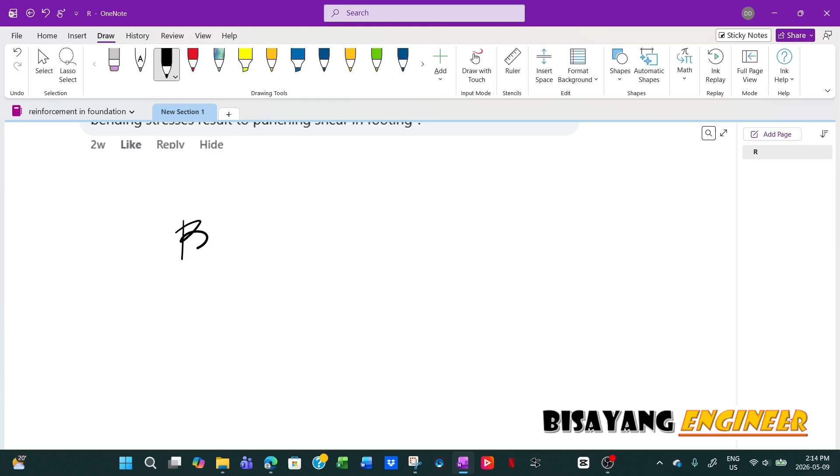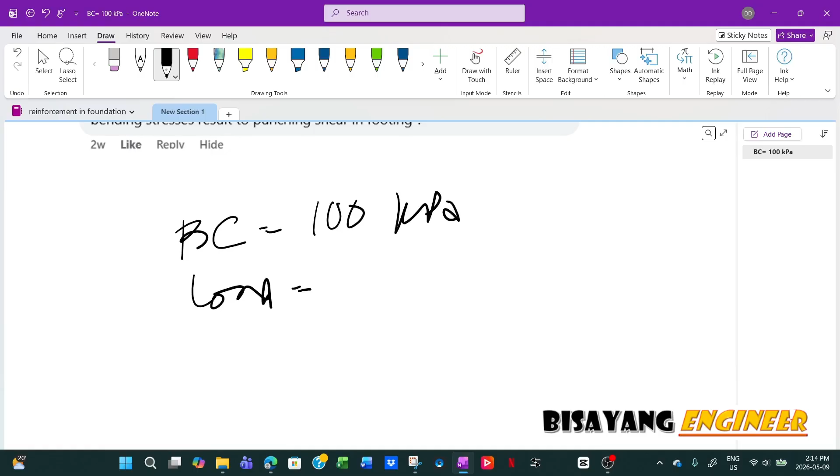As we all know, the procedure for designing a footing is first: you have the bearing capacity, right? Say, for the sake of discussion, 100 kPa, and your load is 100 kilonewton, just for the sake of discussion.

So first, when you design the footing, you have the load and the bearing capacity. First is to determine the area, which is length times width. All you have to do is divide the load by the bearing capacity, so now you have the area.

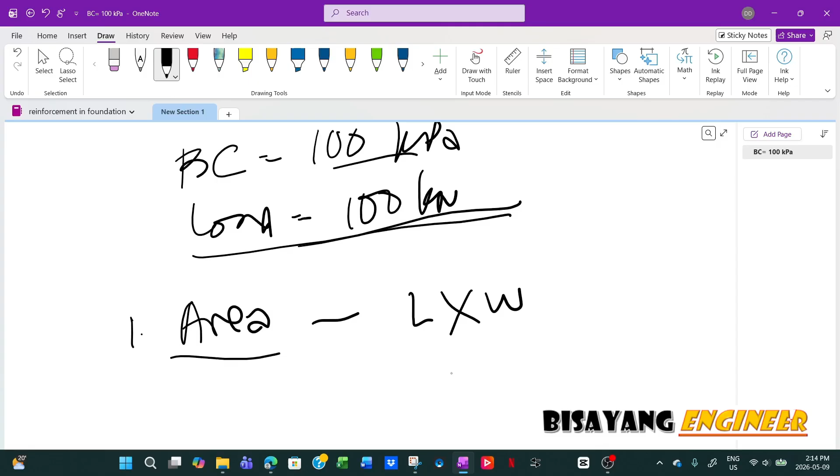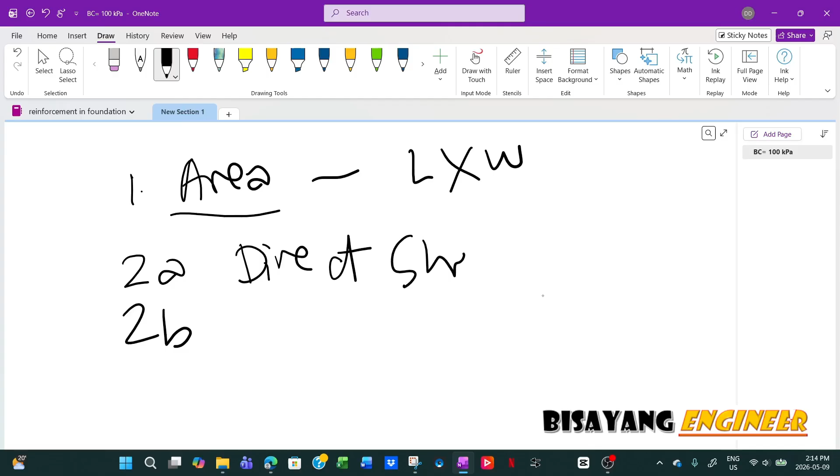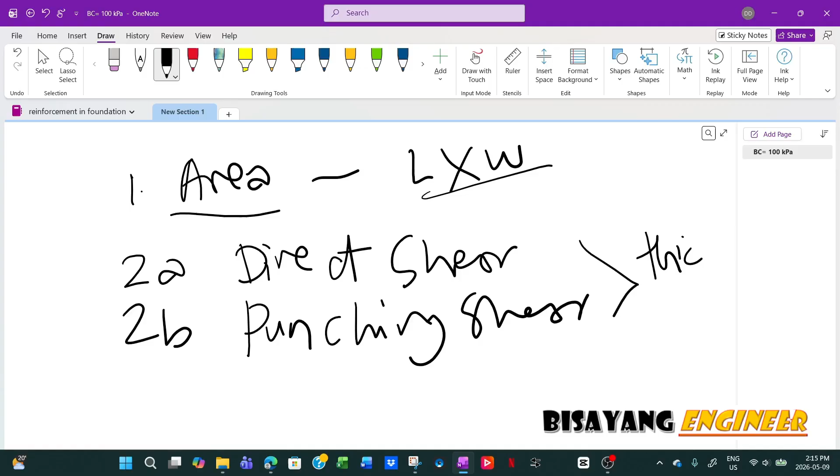Now, next check for that is 2A and 2B. This is the direct shear or one-way shear, and the second way is punching shear or two-way shear. At this step, you already have the dimension, so this time you will check and design the thickness, depending on which governs between direct shear and punching shear.

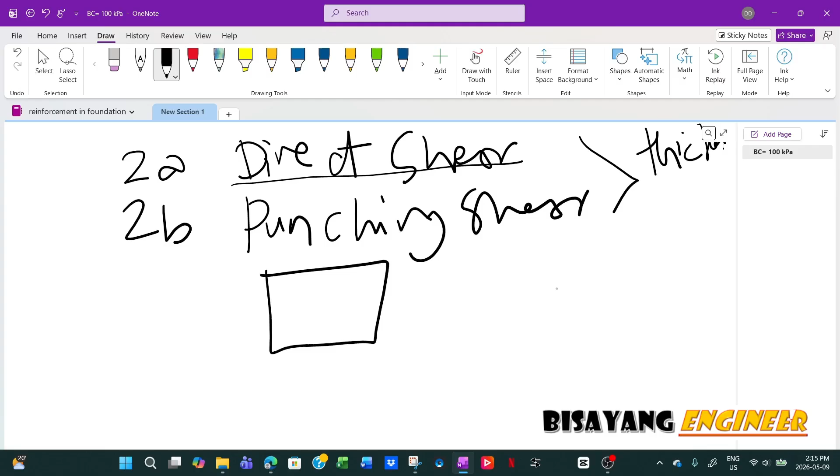So now you have the area and the thickness. Once you determine the area, the dimensions, and the thickness, that's the time you check for or design it for bending - step three is bending, and that's where you get your rebars.

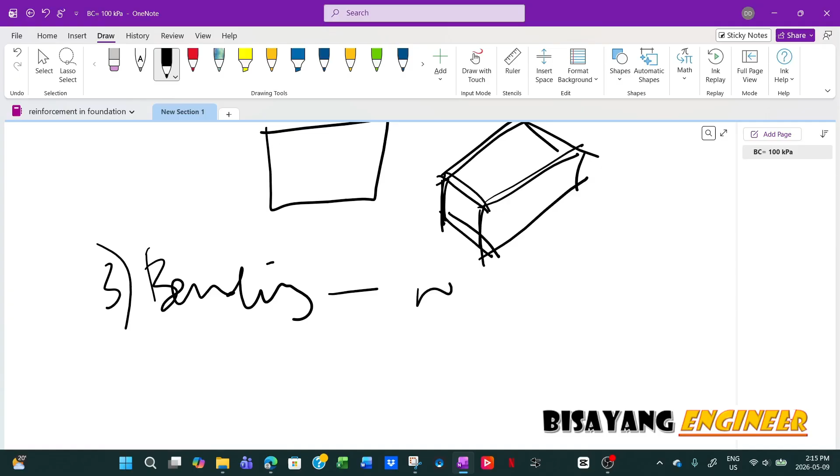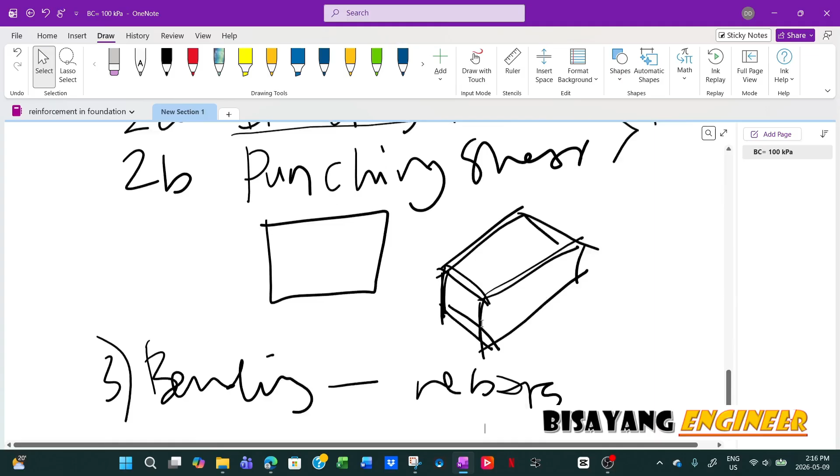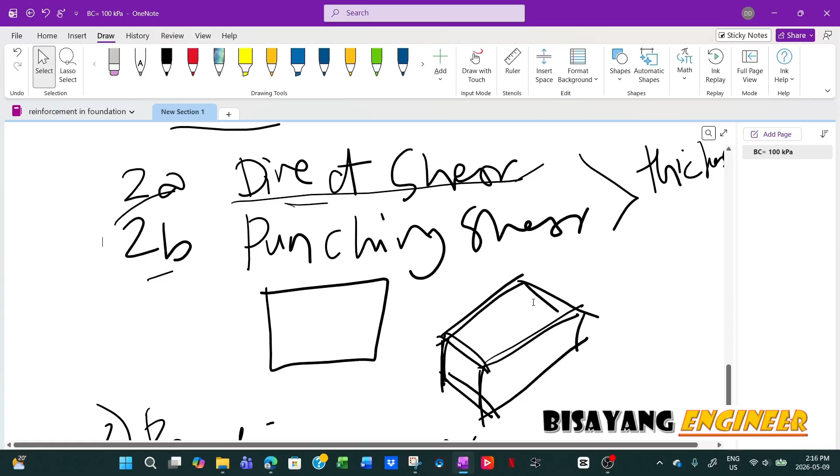Now, that's why I was confused with his comment, because he said you have to compensate the loss of reinforcement. In practice, this is what you do: determine the area, then check for thickness. So you already design for thickness even before you design for reinforcement. Why would you compensate the loss of reinforcement when in the procedure you have to check the thickness first to meet the punching shear or direct shear requirements before you design the bending?

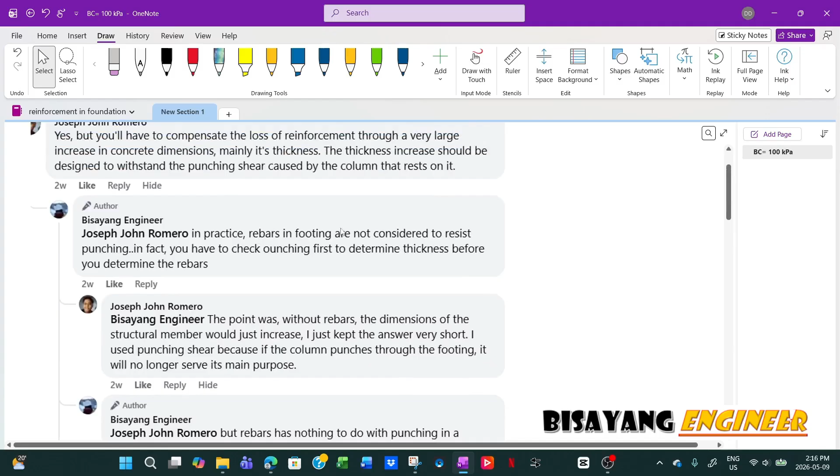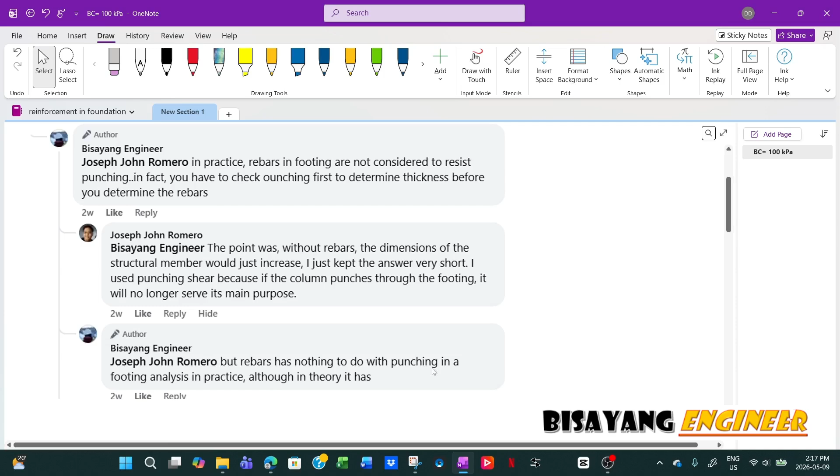So this was our first exchange of ideas. I told him rebars have nothing to do with punching in footing analysis in practice, although in theory it has. Of course, once you have the rebar - but like I said, in practice we don't consider the rebar for punching, but it has, in theory, some help - we just neglect that part in designing the foundation.

It's the same as if you design, for example, a flat plate - all you have to do is add reinforcement to resist the shear. For example, if this is your column, this is your footing, this is your punching shear plane. Now, if you have rebars here, it will cut through the rebar, right? So in theory, it still helps with the punching.

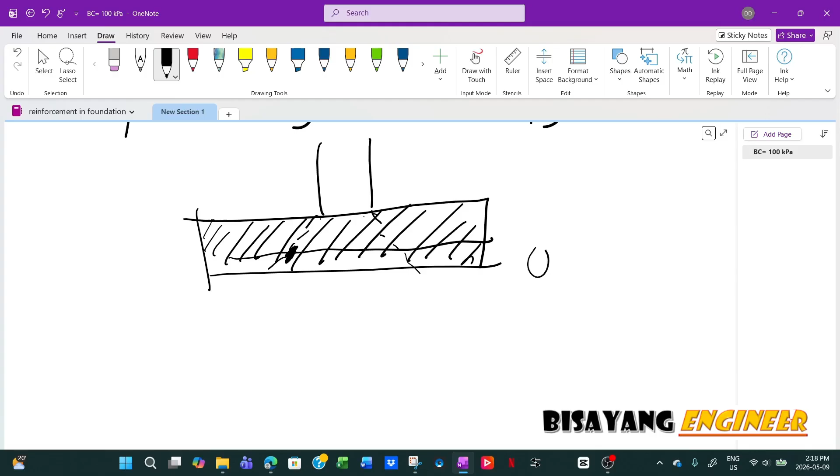But in practice, we don't do that. We'll just check the full capacity or full resistance for punching, relying on the capacity of the concrete itself without any reinforcement. So you use the formula for that.

So that's why I was confused with his comment. And then in further discussion he mentioned that the bending is initial failure.

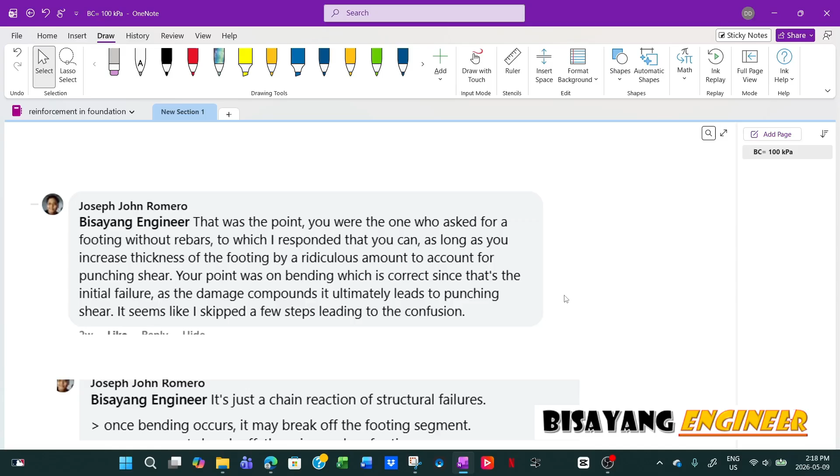He's talking about initial failure and then the final, the ultimate failure. So this is his answer or response to mine. If you're curious about our discussion, you can check that post, but I only took screenshots of some of the important points he raised.

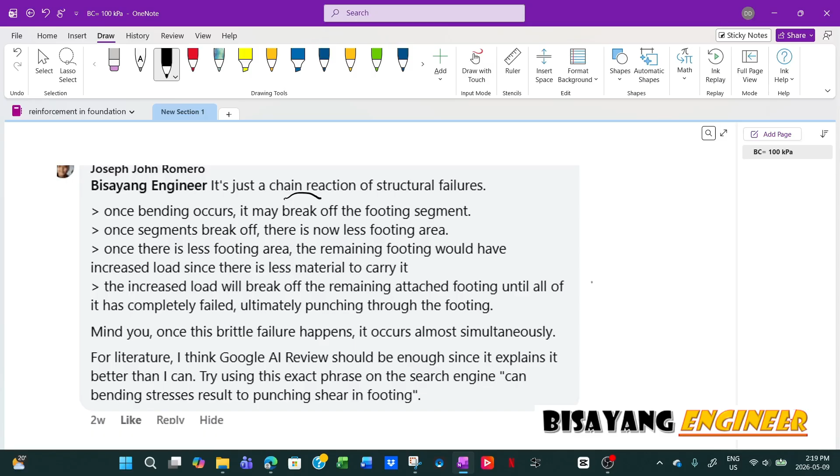So he said it's just a chain reaction of structural failures. Once bending occurs, it may break off the footing segment, and once segments break off, there's now less footing area. And I told him I understand this sequence, no question.

Basically what he meant was, so if this is your footing, right, and this is your column, and you have the rebars here. Now if this, for example, is your shear plane, this is where you need the rebars, because this is now outside the influence of the shear plane.

So that's why, in whatever chapter that is in ACI, as long as this length here is equal to or less than the depth, then you don't need reinforcement, because this is now in compression.

Even in the ACI code, under plain concrete, you don't need reinforcement as long as the element is always in compression. So this is what I'm trying to arrive at when I posted that question, because I'll be discussing footing and also underlying foundation.

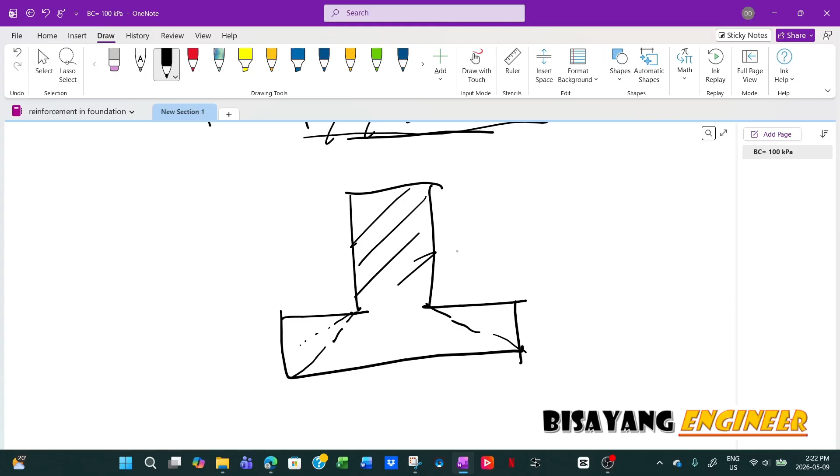But my point was, if you have a column or wall footing, and this is your wall or column, and if this influence line - even if you have a thick footing - what will happen is it will follow the same slope regardless of your thickness.

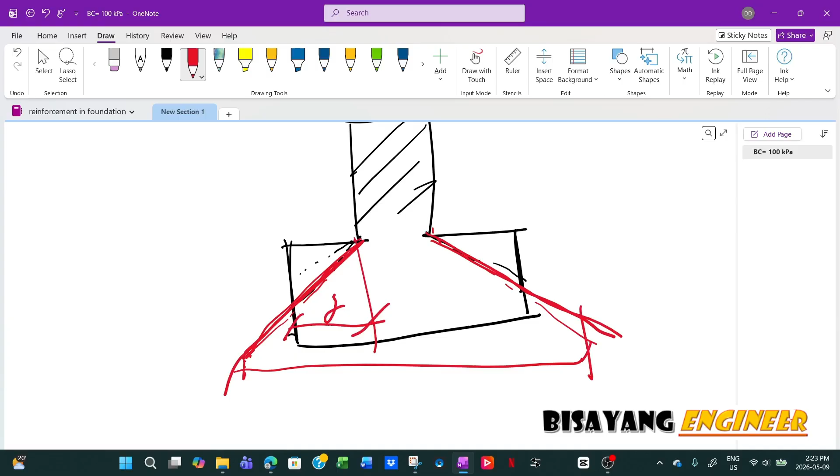Now if this influence line exceeds the width of the footing, or if this cantilever portion, say L, is less than the depth, what will happen to the failure or the shear plane?

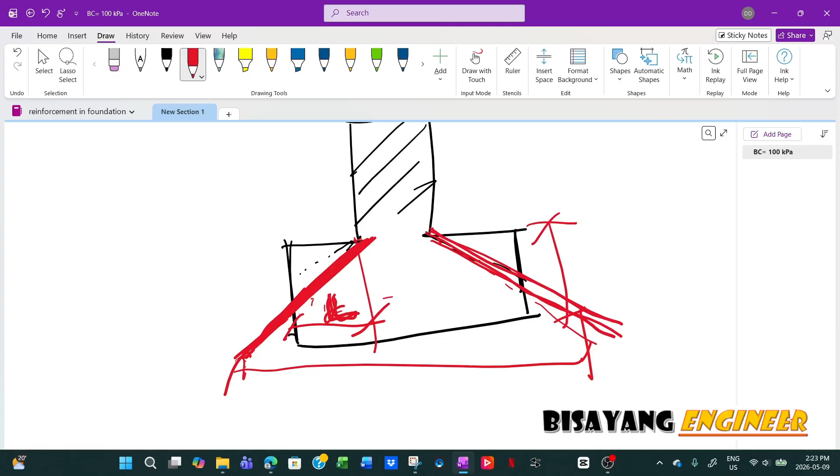That means this footing will always be subjected to compression, unless there's an uplift on your footing - that's another story. But if this is always subjected to compression, then technically you don't need reinforcing bars here, because it's always in compression.

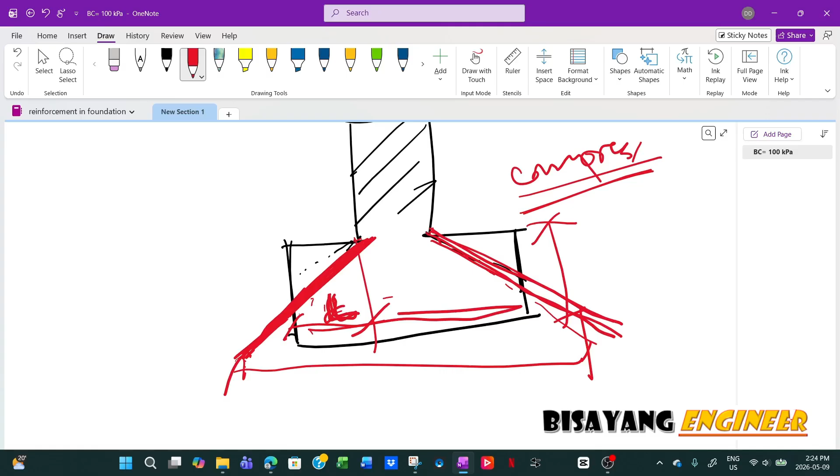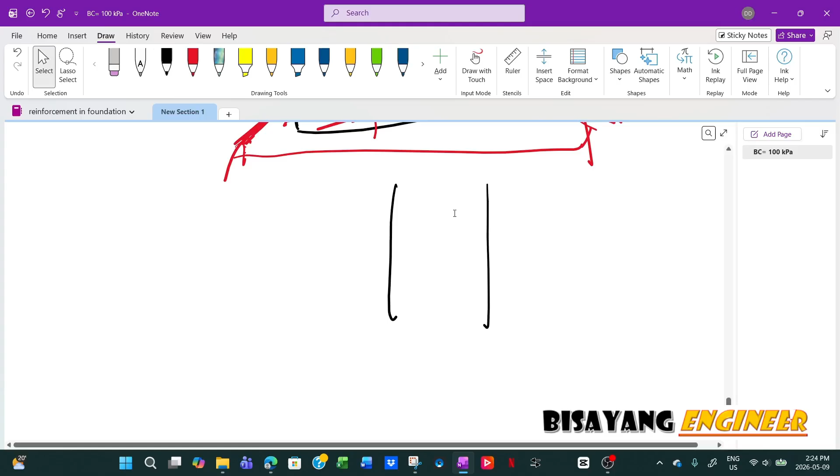The same if you have an underlying foundation, like a pile or bell pile as we commonly call it. So this is what it looks like for a bell pile. Now the reinforcement for the underlying foundation or bell pile - that's the only reinforcing bars. And sometimes this vertical column doesn't even reach the bottom of the pile.

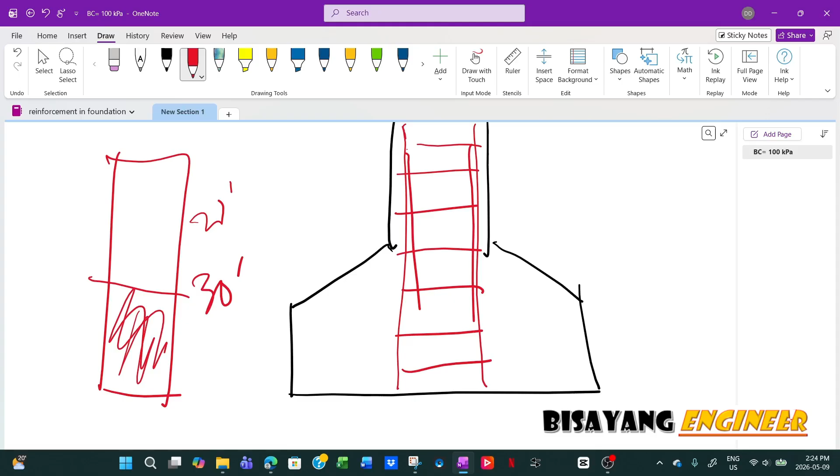Sometimes you have, say for example, this is 30 feet. Some engineers will design the pile only up to, say, 20 feet, and then this part is no longer reinforced, which is fine - I've seen this many times with other designs, but personally I don't do that. I always have reinforcing bars all the way down.

But this part is not reinforced. So all you have to do is design the bell area based on the bearing capacity and the load, so you'll have the assumed uniform pressure here. This will shear off right here with this load. Now as long as this thickness is designed to resist the punching, you don't need reinforcement.

So this is what I'm trying to say, or what I had in mind when I posted that question - that you don't need reinforcement here. Same with footing: as long as this is always in compression, you don't need rebars.

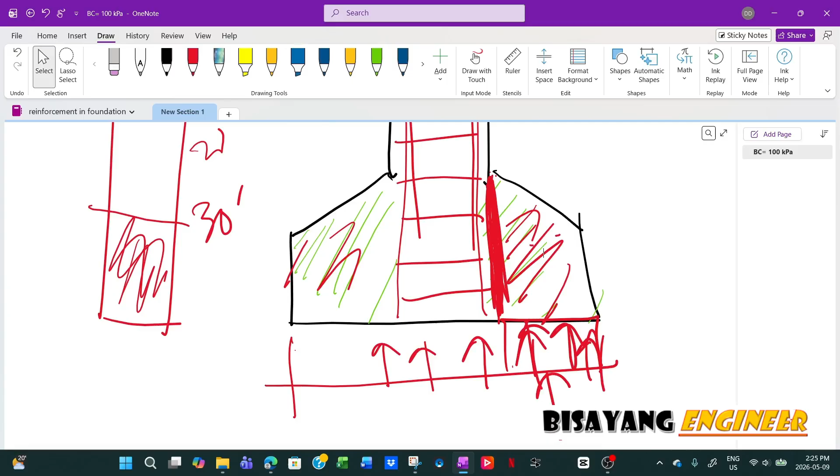The confusion starts when he said to compensate the reinforcement, the bending is the initial failure, and then what we call punching is the ultimate failure. And honestly, I've never heard or read something like that in any literature I've read.

That's why I asked him, because that's what I always do. If I see comments I'm not familiar with, even on Facebook, I will always research, just to know if there's something new, some innovation. I always do that, always search, so by reading I will learn something.

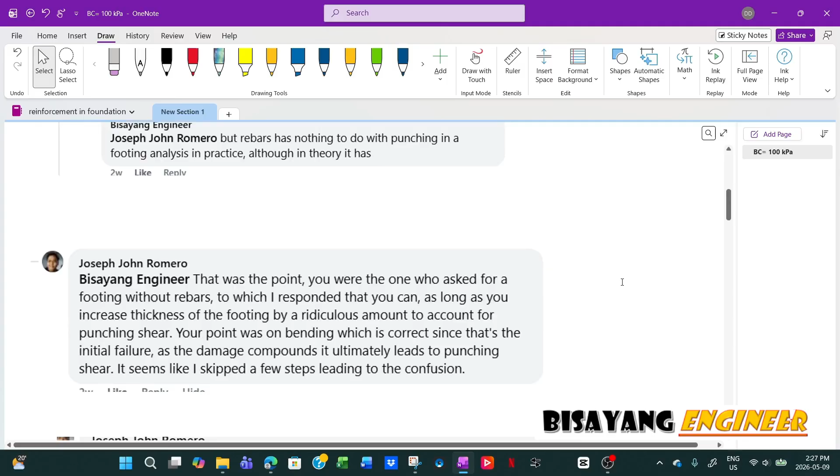So I asked him, do you have any literature that I can read, because it really interests me what he said.

Well, at first he said he searched AI. Disclaimer, I don't really trust AI right now, because what AI does is gather all available information, even if it's wrong. It could be a Facebook post, a forum, or any discussion, and it will compile all that information.

That's why, if you've tried this, we've tried it in the office, if you just twist or rephrase the question, it will sometimes arrive at information completely opposite of what you searched earlier with the first question. So he said, try using this exact phrase.

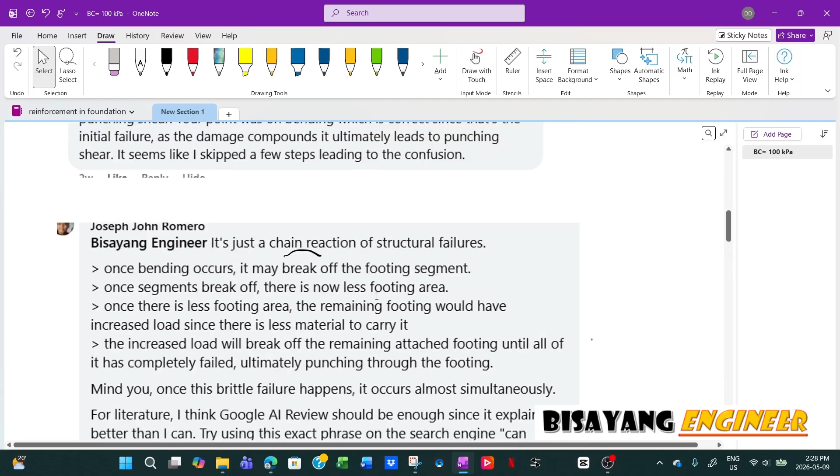I haven't tried it, but yeah, we can. And then he also mentioned a book - I didn't screenshot it, but he mentioned a book. I searched it, and it referenced ACI as well.

I don't know, maybe I missed something, but I'm not familiar with the recent provisions of ACI, because the last time I read it was ASCE 7 or ACI 318, I think zero... I can't remember exactly, since I was still working at the outsourcing company in 2009. The last IBC code I used was 2006, and ACI 08 I think. But over that period, I've never read that initial failure is bending and the ultimate failure is shear.

So I was really curious, and I asked him what literature he read so I could look into it. He mentioned a book, and I looked it up. I told him in my comment that if it's not too expensive, I'll buy that book for sure.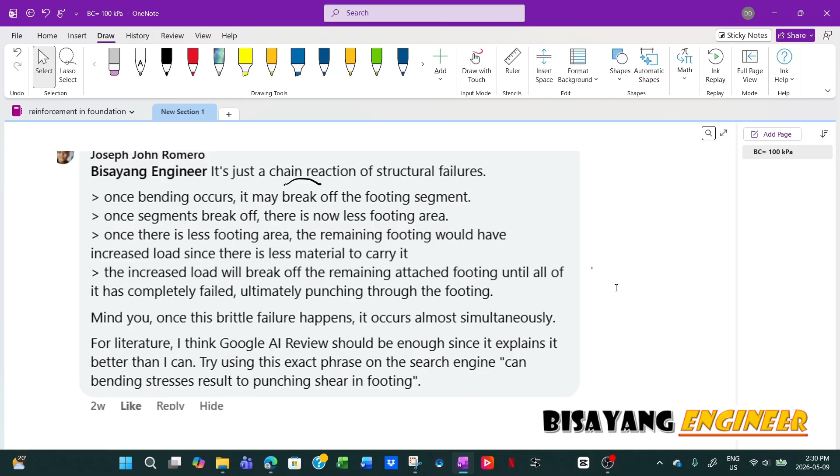When I looked at it on Amazon, sometimes you can see the table of contents or an introduction preview, and it referred to ACI 318.

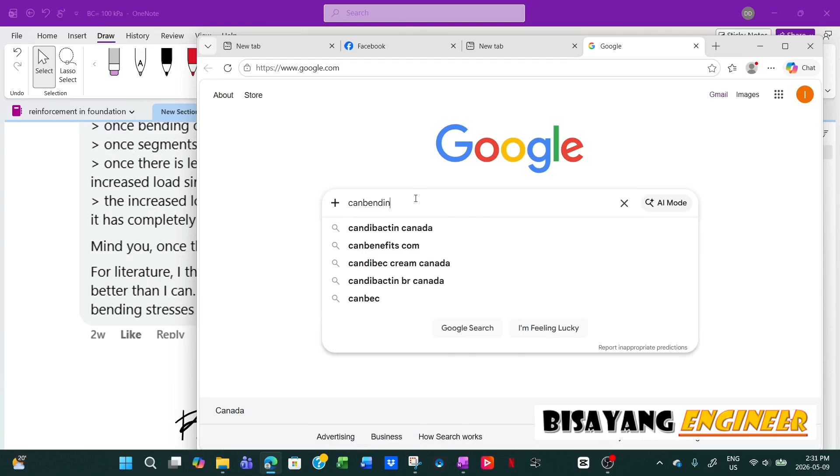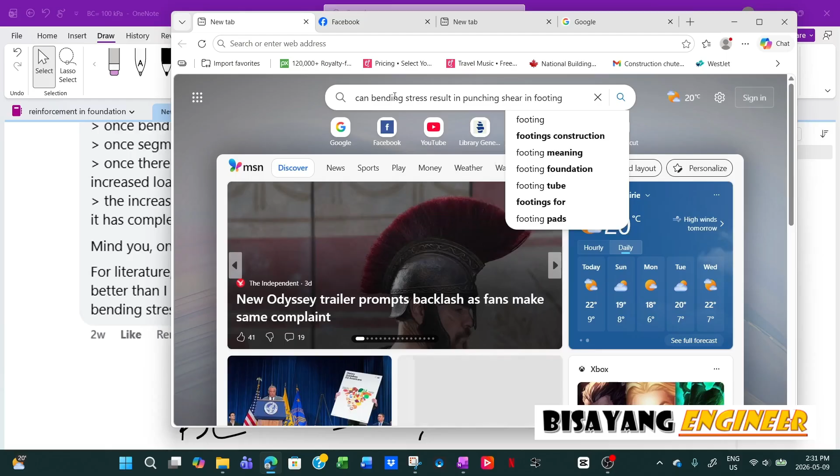He said, let's try this search - use the exact phrase 'can bending stress result to punching shear in footing.' Okay, let's study that: can bending stress result to punching shear in footing.

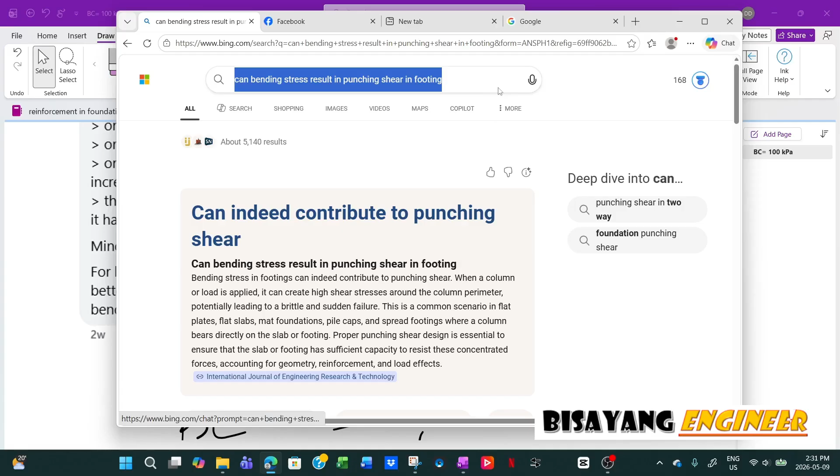I don't think this is it. Let's try Google instead. So this is what he searched in AI.

It said bending stress, specifically in the form of unbalanced moments, can result in or significantly increase punching shear in footing, while punching shear is primarily caused by vertical concentrated loads. Bending moments transferred from the column to the footing create additional uneven shear. This is different.

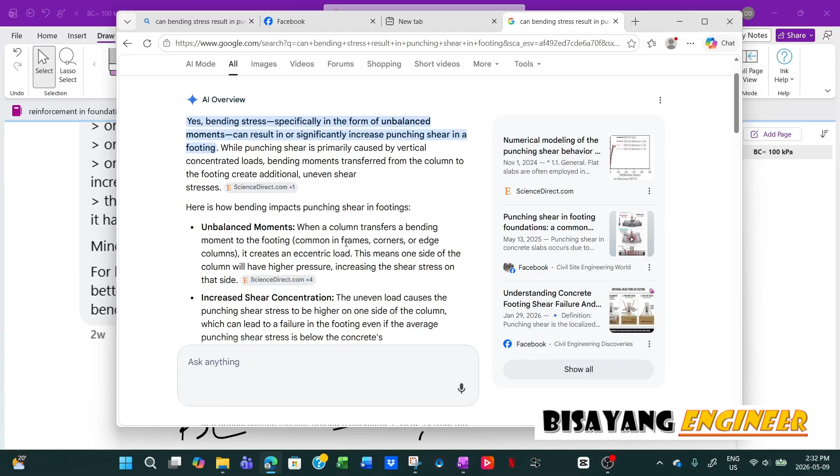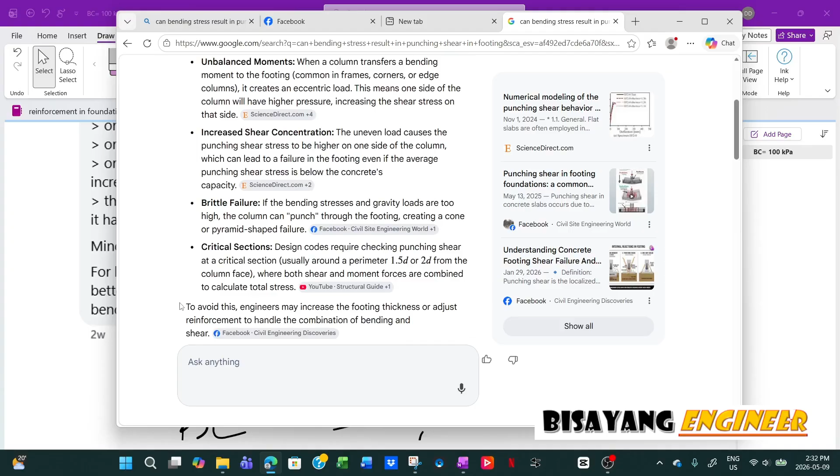Because what it means is you have an unbalanced moment, so the break failure, shear is higher on one side of the column. No, this is different - it doesn't say that bending compensates.

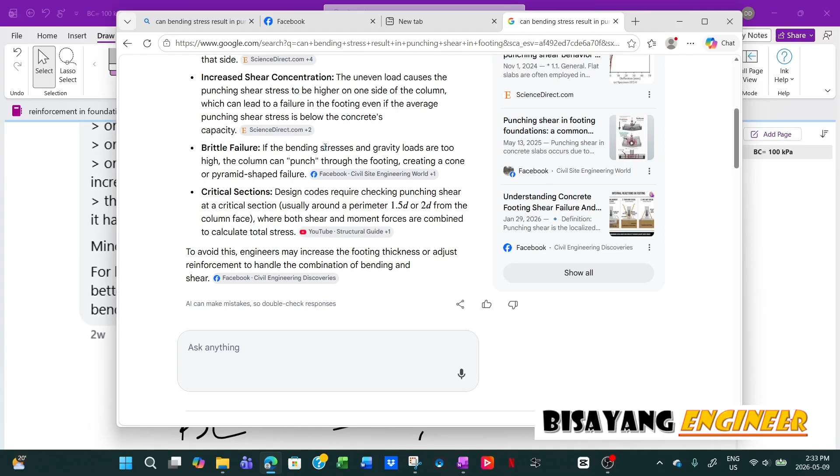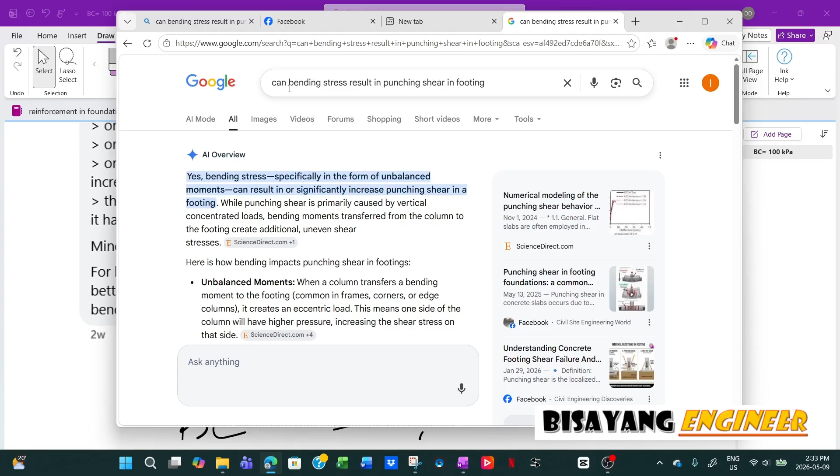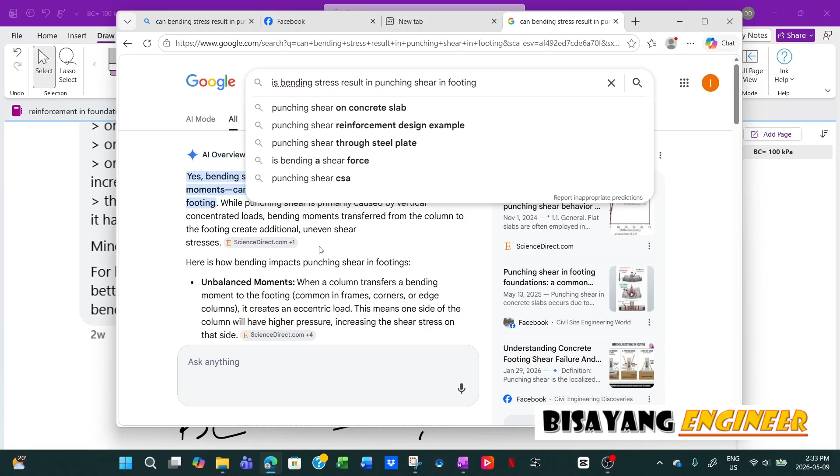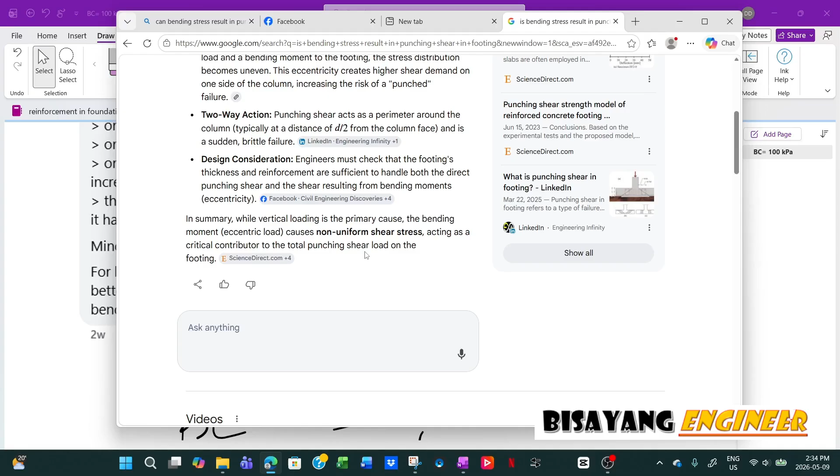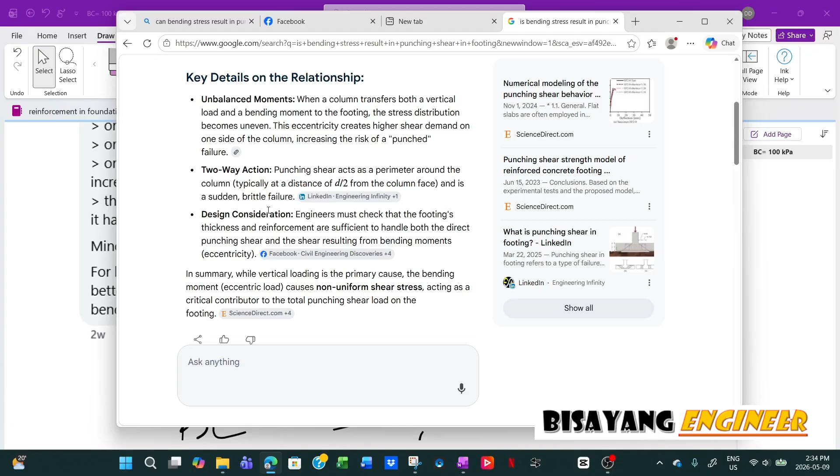So the same ScienceDirect source mentions unbalanced moment and two-way action. Now there's another piece of information here, two-way action, which wasn't shown in the first search. This is what I mean when I say I don't really trust AI - once you change a single word or rephrase the question, it shows different results. At least this one shows the unbalanced moment, but the two-way action punching shear was never in the first one.

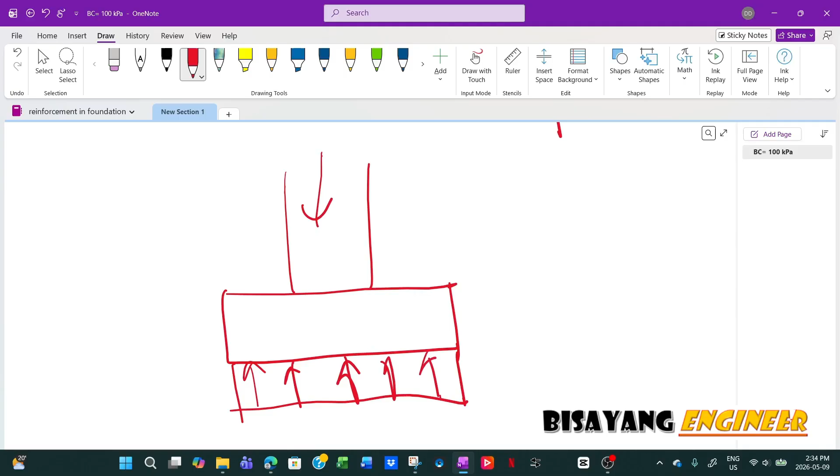So this unbalanced moment, what it does is - for example, if this is the footing and this is the column, if it's pure axial compression only, you will have uniform bearing. But once you introduce a moment in that direction, there will be a minimum and maximum pressure - most likely it will look like that.

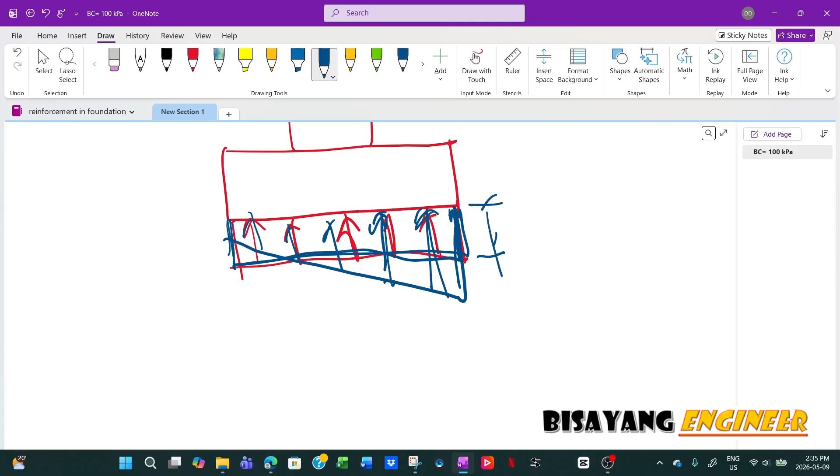Now, if you design or check the punching shear based on this uniform load, that is not accurate because once you increase this, you will notice that you have a trapezoidal pressure here, which is way higher than your balance load. That's why it's called unbalanced moment, because that moment...

This extra low bearing pressure here, because of this moment in this direction, it will increase the pressure at this and this one on this side. That's fine, it's lesser, but on this side here it increases the bearing pressure because of that moment.

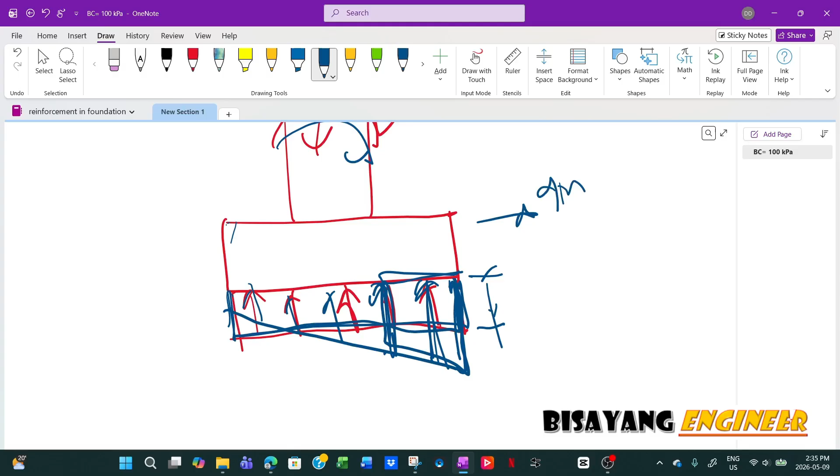That's why in your bearing check you have to get the maximum, Q max, which is equal to P over A plus minus M over S. This plus will give you the maximum, and then the minus will give you the minimum, and then you will have that middle third.

The resultant has to be in the middle third so that there is no uplift going on. Because sometimes if the footing is small and the bending is large, what will happen is there's a chance that the bearing pressure will be like this, and there will be a net uplift here, which is really not effective.

And most software, once your resultant is outside the middle third, it will just not run. Some software, for example ASDIP Footing, will not allow you to proceed with the calculation.

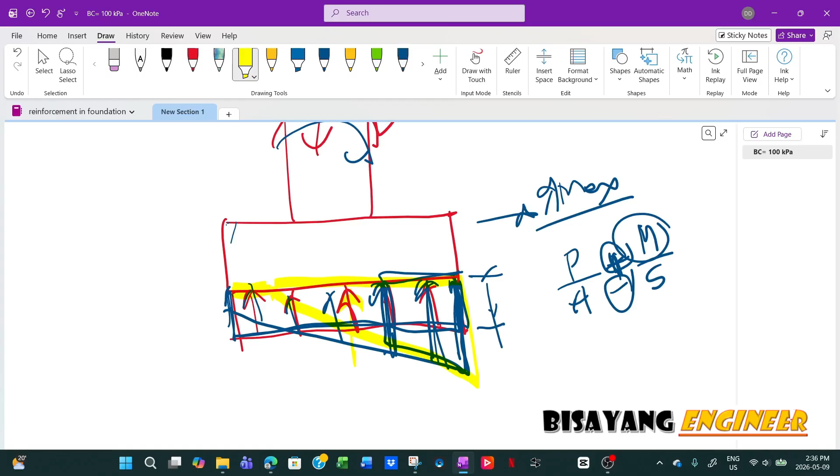Like I said, some software, once your resultant is outside the middle third, it will not proceed with the calculation. You have to adjust the dimensions.

So in this scenario, you have to design the thickness of the footing so that it will resist, so it has enough capacity to resist the increase in bearing pressure. So that's what this one here shows.

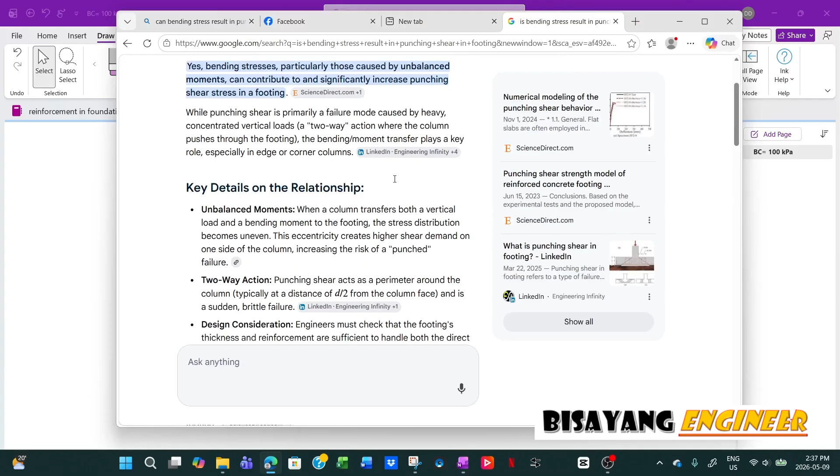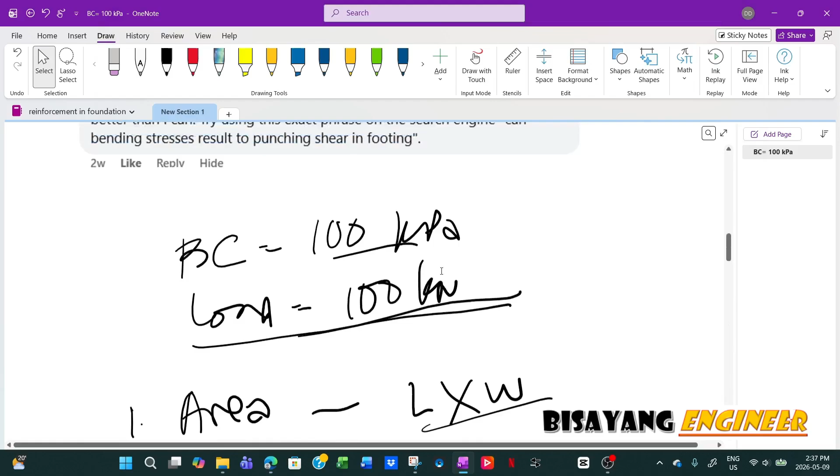I have no question about that one. My only concern, or what confuses me, was his first comment, where he said you have to compensate the loss of reinforcement, and it will have a ridiculous... He says as long as you increase the thickness of the footing by a ridiculous amount to account for the punching shear, your point was on bending, which is correct, since that's the initial failure and the damage compounds, it ultimately leads to punching shear.

So that's the part that I don't really understand, and I'm trying to find information. If you know something, just let me know, because I'm really interested. I've never encountered such a statement in any literature that I've read, and I'm really interested to see how it was worded.

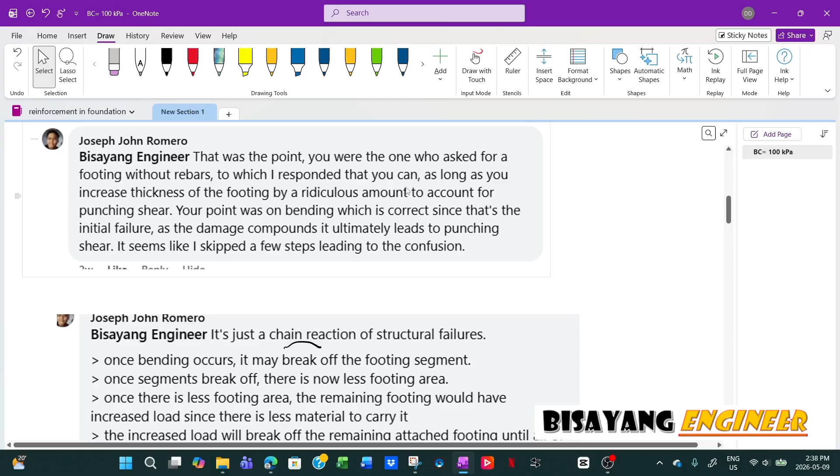I just don't understand why you need a ridiculous amount to account for the punching shear, when in the design of a foundation you do the shear check first before the rebars, right? Because sometimes you don't need rebars, like in this example.

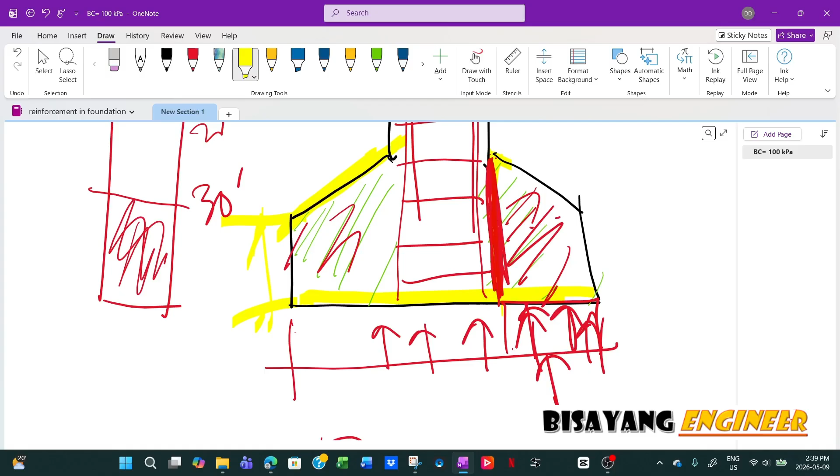You don't put rebars in a bell pile - of course, how can you do that? But all you have to do is make sure this is thick enough, and then whatever the angle is, so that this length here, when you check for the punching shear, is more than enough to resist the bearing, or the shear due to the bearing, at the base of the pile.

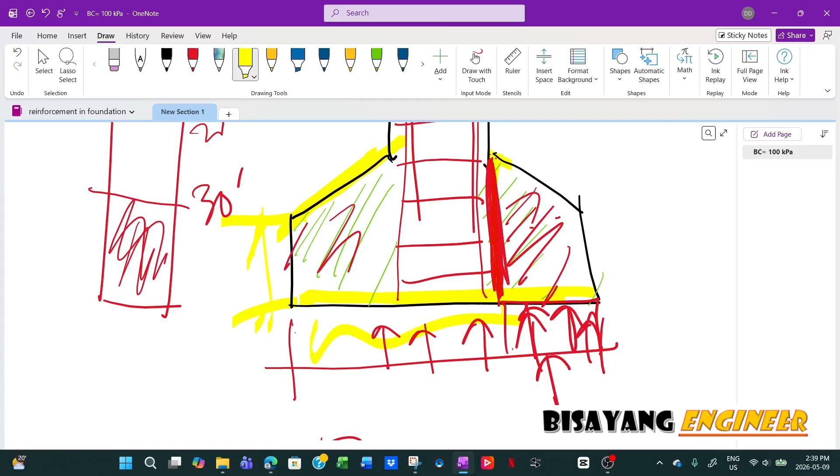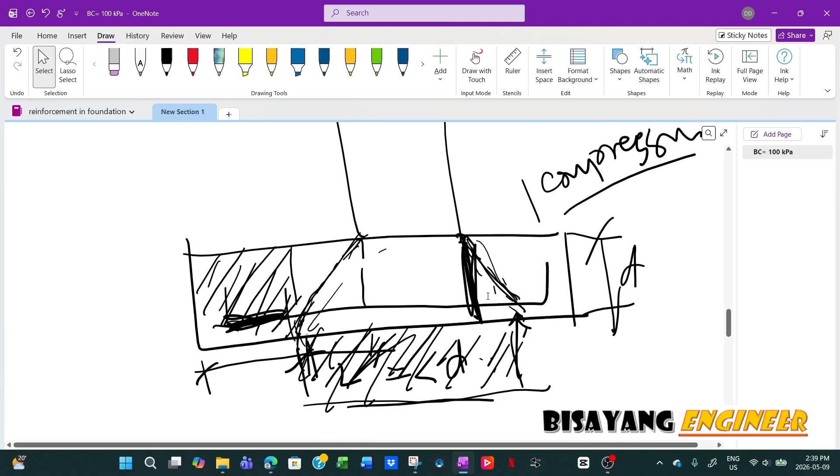And the same with wall footing. Now, if your footing is wide, and this is no longer within the influence line for the shear, then this part here, of course, needs reinforcement if this exceeds the depth.

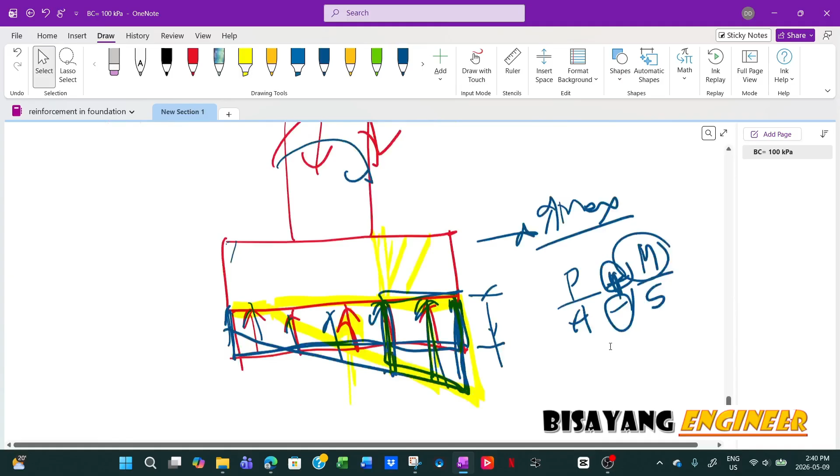That's why I also posted this in one of the posts, I don't know if you remember, where basically what they did is, this is the footing for the column, but their footing is trapezoidal, something like that. This is the same as the bell pile - this is just for footing, but theoretically it's exactly the same as what a bell pile is.

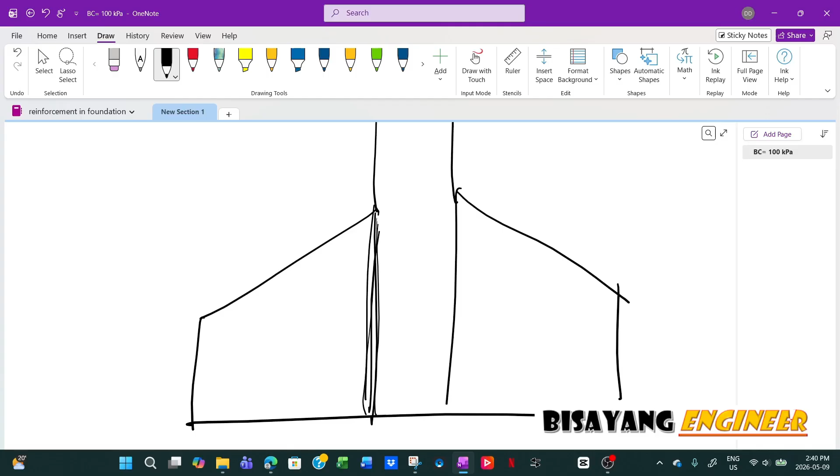So as long as you have enough thickness here to resist the punching shear, these lines usually follow the slope of the shear plane. Now, if this portion at the base is shorter than the projection of this line, then you don't need reinforcement - technically you don't need it, but you still have to provide temperature bars. But for an isolated footing, shrinkage, I don't think shrinkage would be an issue if you only have a wall footing.

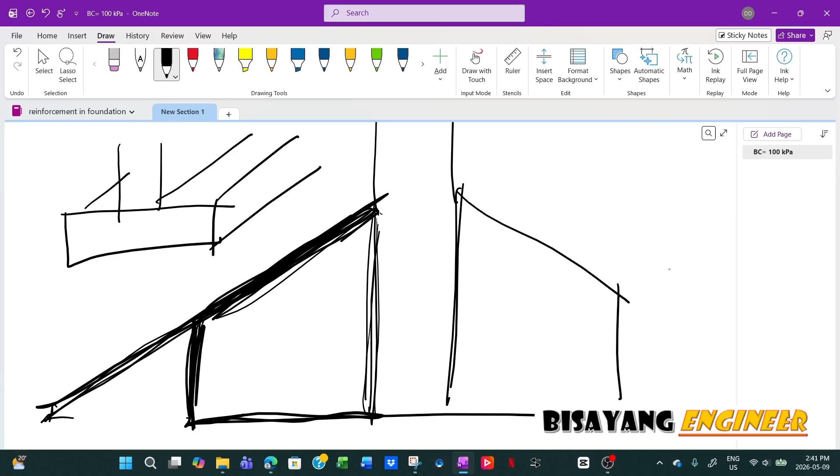You don't need temperature bars for wall footing, but in practice we just put minimum. Technically you don't need one as long as it's always in compression. The idea with footing not having a temperature bar is because, if this is a wall footing...

Any cracks, there will be no cracks along this length. The cracks will be perpendicular to your wall, that's where your crack is. But if there is ever a crack, it will always be held together by this wall footing, not restrained. So it will never be an issue in this direction because it is always stiff because of this wall.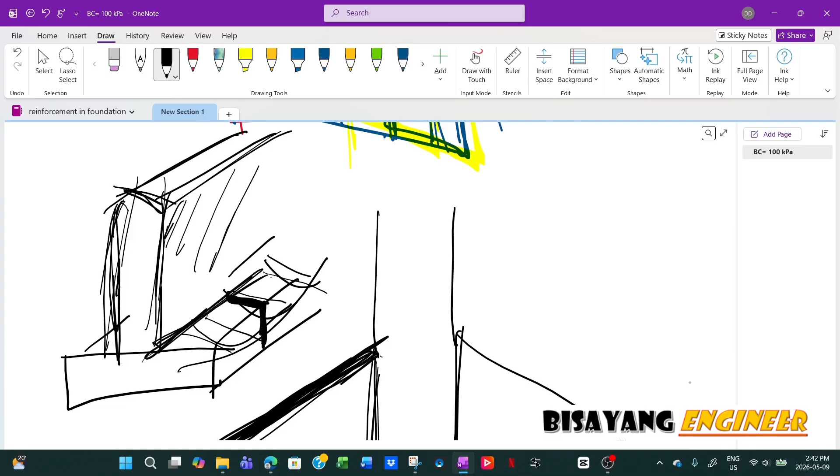But in this direction, that is where you have issues. As long as, for example, if there is a crack right here, what would be the possible outcome for the foundation? Like nothing, right? Because your bending, if it bends, is in this direction also. It will not bend in this direction because it's really stiff.

Even if you consider differential settlement, it will not happen on the full thing, it will happen like the entire length per segment. That's fine, it probably tilts by how many degrees, but it will not cause any issue on the footing along this direction because it's really stiff, unless the bending is really large, or your load is really large, and then this will get a really large bending on your beam.

But if we are talking about wall footing, this could be a 10 foot deep basement wall or foundation wall. So it's not going to be an issue.

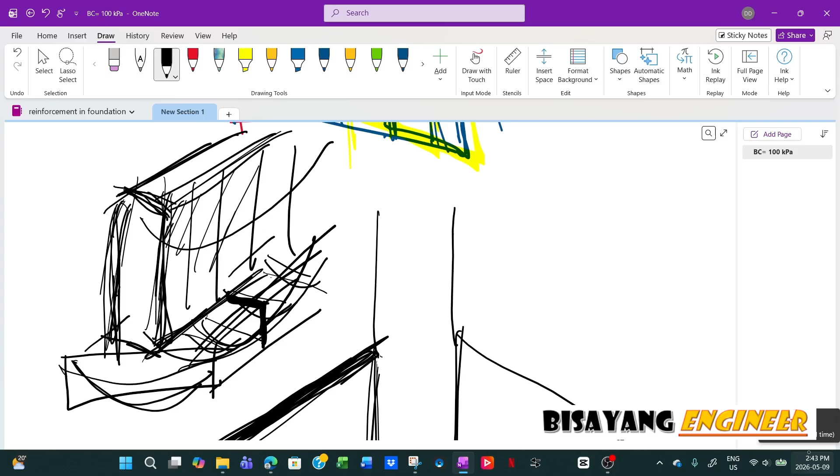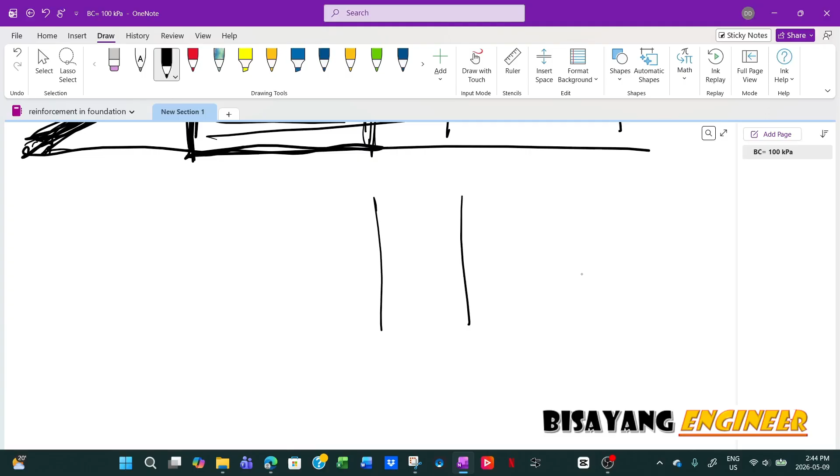For transverse bars, as long as it is within this line projected from the top of the footing down to the bottom, you don't need reinforcement here, unless it exceeds that. For example, this is only 10 inches, but this one is say 48. So that means if you project this line, this portion outside the line, then you need reinforcement here because this will bend for sure. So you need reinforcement right there.

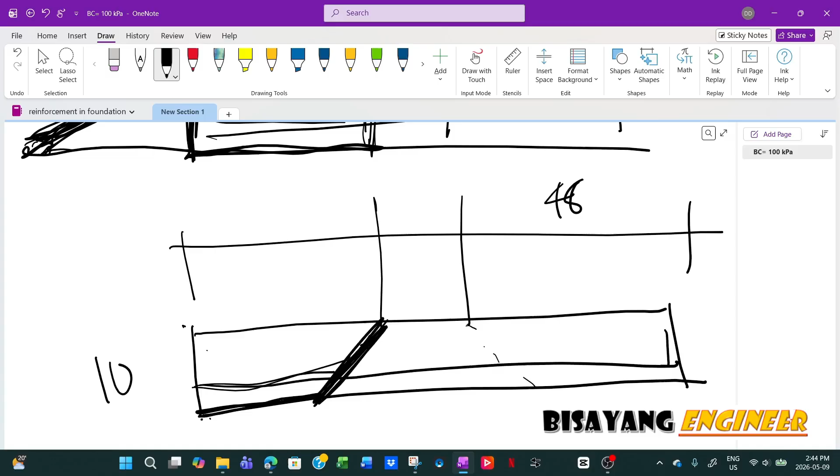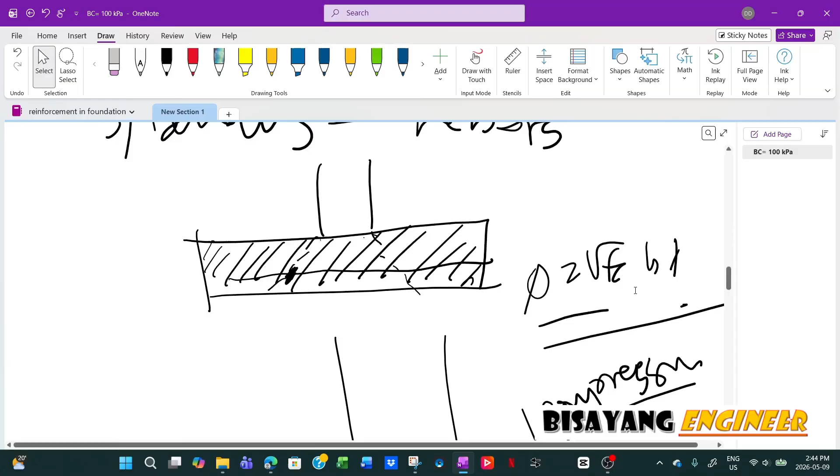I really tried to find information regarding his point, but I just can't find it. Maybe if you know something, I'm really interested to learn about this one. But like I said, I've never encountered this point, or what he raised here. I've never seen this, I've never read this in any of the literature that I read.

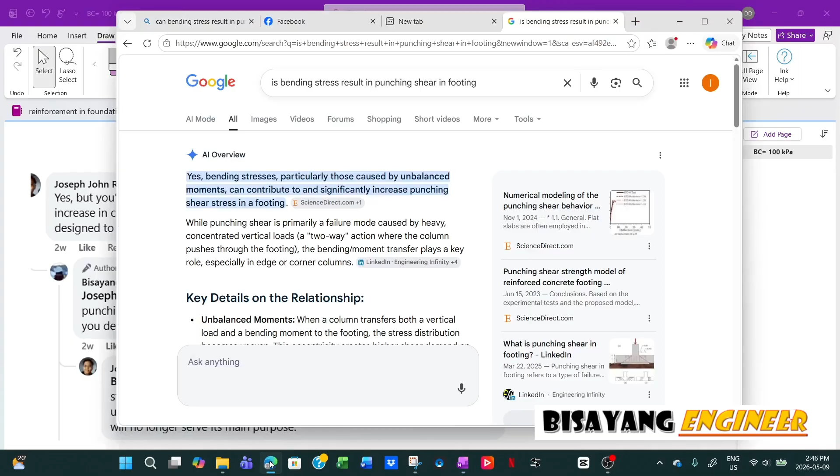So, and still we still not agree with each other. So I just told him, okay, we'll just agree to disagree at this time. Anyway, so that was my point.

Before you check for bending, you already check for punching and shear, because that's how you get the effective depth to design for the reinforcing bars, right? So I just don't get the idea, his point, why you have to compensate the loss of reinforcement with a large dimension of footing, and it will be, in his words, a ridiculous amount to account for punching shear. So I don't know.

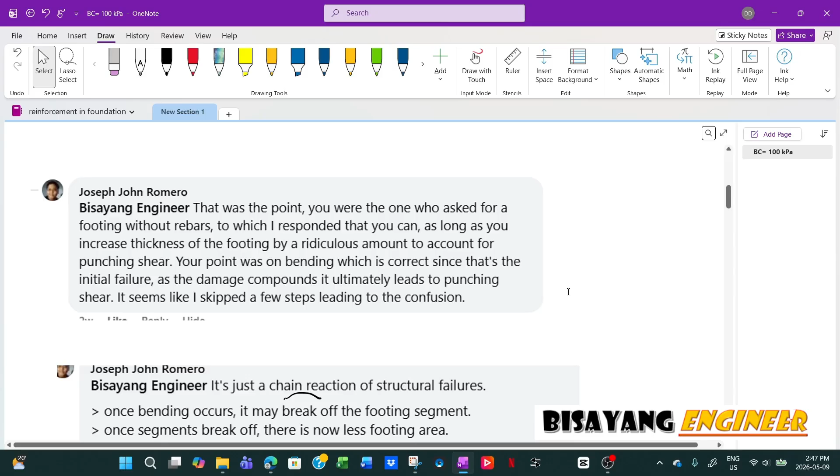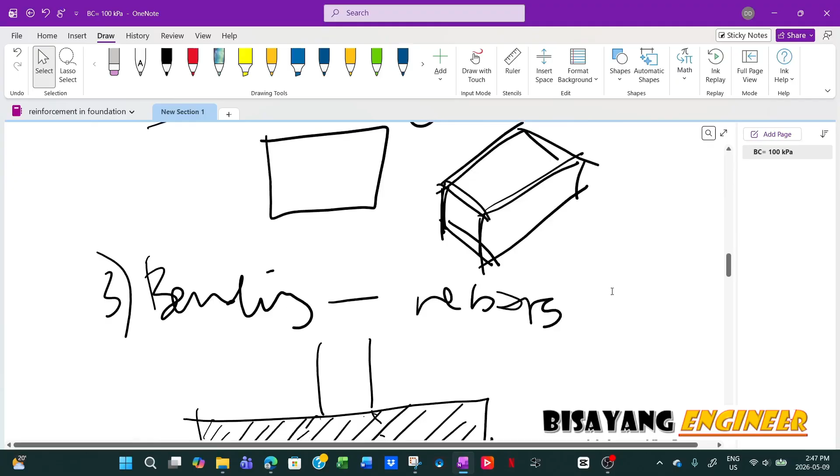If you design the footing to meet the punching shear alone, and then you just have to see to it that there is no projection here, why would you need to compensate for the loss of rebars when you already, in the first place, designed for punching before you even arrive at, or even do, the bending of the reinforcing bar.

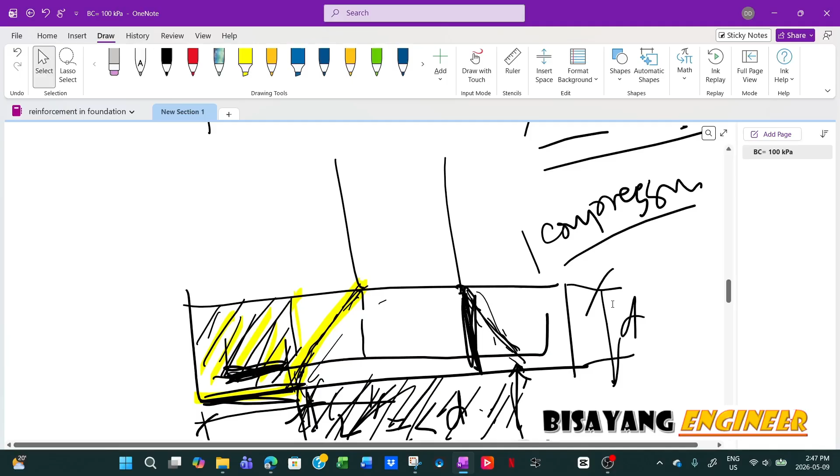Maybe one of you guys can mediate, or how do you call this, some kind of tiebreaker, because at this time we still don't agree with each other. But anyway, yeah, I think that's it for today. Okay, bye.